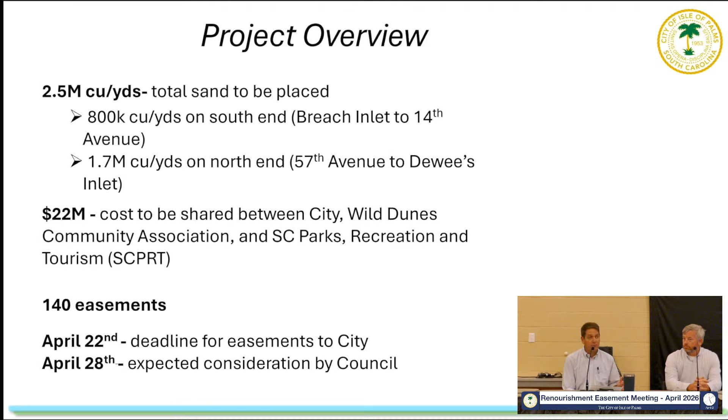Thank you. Again, my name is Stephen Traynum, president of Coastal Science and Engineering. Our company has been around since 1984, focusing solely on coastal erosion problems and solutions. We've done over 50 large-scale beach and ocean projects up and down the East Coast, very similar to this. I've been with the company about 20 years and been working at Isle of Palms that entire time. I think my first field trip to the coast to collect any data was coming down in 2007 and looking at the sandbags that were all over the east end of the island.

Next slide. Okay, great. So this project, in some ways, is very similar to prior projects completed at Isle of Palms. We did the first nourishment.

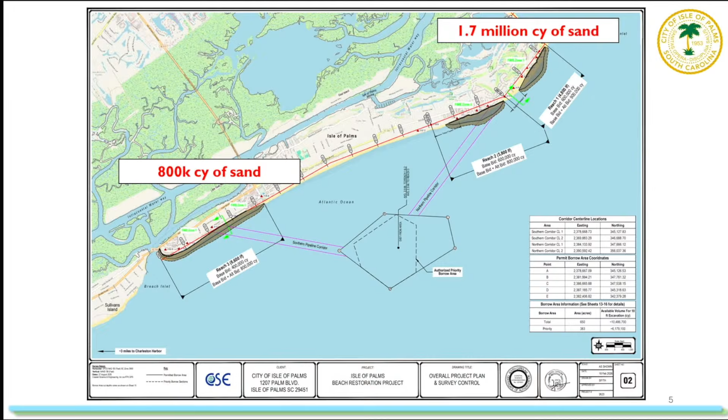Equipment, the staging on the beach, and how it looks, how the dune's built. There's photos of that back there, so I encourage you to check that out after the meeting.

The work will be done with a cutter head dredge. That type of dredge has a continuous pipe that connects the dredge and the borrow area to the beach, so that pipe will come on shore in the center of the fill areas, and then they will work north and south to complete the work. Next slide.

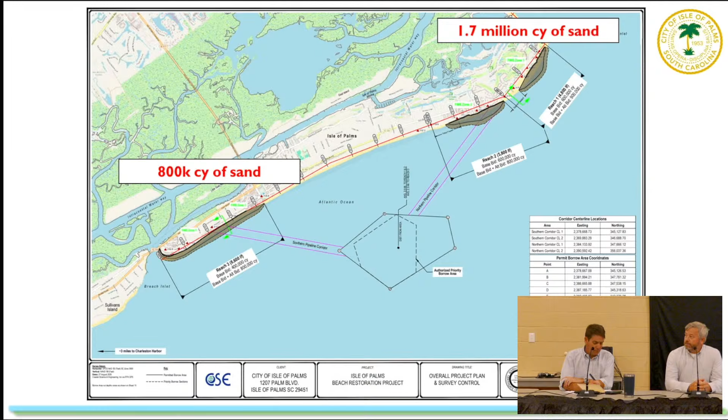Right now, the project includes removing any existing sandbags. The state permit for those bags requires that they be removed, so that would happen in concurrence with the project. In any areas that are currently still vulnerable to erosion, there's a handful of properties, including Ocean Club, where water's still getting up near the building. We would coordinate sandbag removal with construction to make sure that the building's protected. We're not going to remove all the sandbags well ahead of nourishment and leave that structure vulnerable. In 2008, we actually had to build a berm around the sandbags, come back, remove the bags, and then come back and refill that void after the fact. I think it would be an easier operation this go around.

Any areas lacking healthy dunes, we will build new dunes or supplement the dune sand that is there, working seaward of any existing stable, healthy vegetation. We are not looking to bury healthy dune areas, vegetation, anything like that. We wouldn't be removing sand fence or vegetation or fencing or any other kind of landscaping infrastructure through this project.

We essentially work from the existing escarpment line. If there's a cliff on the beach, we like to tie into that, or the landward point of the seaward point of our easement area. So when we're complete with the project, we have a natural looking dune system that maintains public access to the beach, and then you'll have a dry sand berm seaward of there. The berm, depending on where you're at in the project, right now is anywhere between 200 and 700 feet wide. 700 feet is one of the largest nourishment berms that happen anywhere on the East Coast. You go down to Louisiana where they're rebuilding entire islands, you may find some wider berms down there, but that's a very wide berm, and there's some places we may even be a little wider than that.

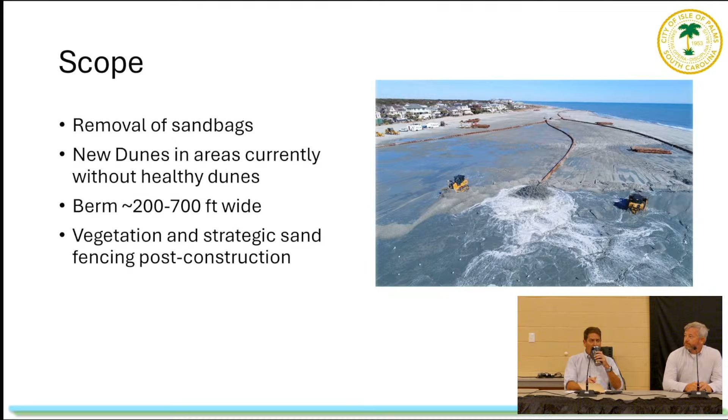A couple of photos of what the project will look like. Up on the top left, there's the steel pipe. That's the pipe that they use to extend the fill down the beach. So you'll see periods of time where that pipe is staged on the beach. Behind the pipe there, you see a couple of container boxes. Those are actually mobile offices that they drag down the beach over the fill area. And you can see those in the bottom left photo when they're on the newly established berm.

On the top right, you see a Y valve where they spread pipe into multiple areas where they can fill. That allows them to fill one part of the beach while they're extending the pipe on the other part, and then they'll flip and nourish one part while they're extending others. So they keep the dredge operating 24/7 and not stop the dredge to have to move pipe around. In some places, you actually may see 4 stretches of pipe moving down the beach.

As they're completing the project, they generally close off a section of the beach in the active construction zone. That area may be about 500 feet wide, maybe a little longer. But where the bulldozers are actually working and the water and sand are coming out of the pipe, they shut down access to the beach to allow that equipment to work safely. They move that area almost on a daily basis. As the project's being built, they may move 100 or 200 feet per day down the beach as they're completing these sections.

So what tends to happen is they will close off about a 500-foot stretch of beach. They will continue to work and extend that closure area, and then they will stop and kind of catch the back end back up at one point. So you'll see it kind of stretch out and then caterpillar down the beach, working, again, 100 to 200 feet per day.

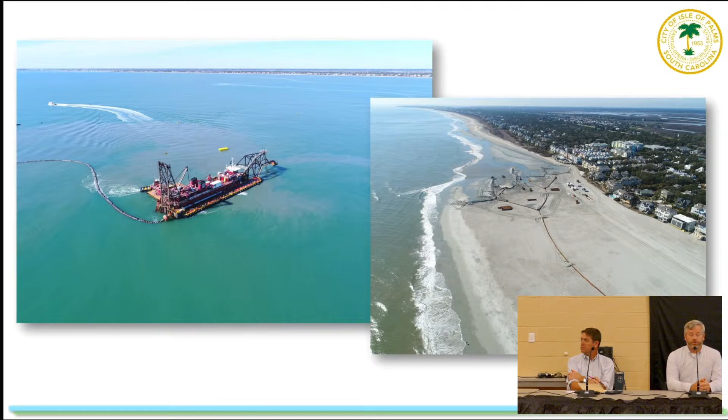This is a cutter head dredge on the left. Essentially, it's a barge with a big vacuum on the end of it that sinks down, or the cutter head goes down into the offshore borrow area, 8 to 10 feet. That's how thick of a section of sand they're digging. They'll pump that through the pipe. That slurry comes out at about 15 feet per second. It's a lot of water and material coming through.

There's about 20,000 horsepower on these dredges. It takes 10 to 15 minutes for the material to actually go from the dredge to the beach through that length of pipe. You see on the right, the single pipe on the bottom right side of the image going.

If you could go back one slide and take a look at the photograph on the right side of the screen. Part of the challenge in talking through with people is that in that photograph, where that equipment is staged, is technically private property. Generally, the deeds on this island extend private property out to the mean high water mark. So that's an excellent photograph showing that that project and that equipment, those pipes, are all on private property at that point. That really is the conundrum that requires us to get these easements.

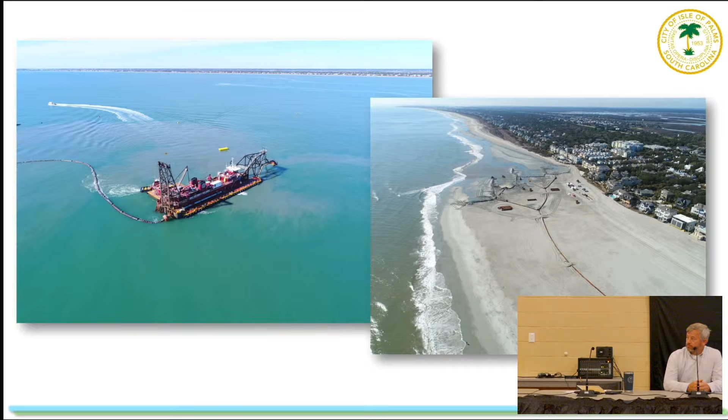Mac may get more into this during his part of the presentation, but this is an excellent example: for this property that has now been renourished, the mean high water line is way out here. You can see where it goes from kind of dry to high tide.

It's the mean high tide, so the average of all those. You could have a 6'8" king tide, or a 5'4", or whatever it is, but it's the average of all those, and it's a dynamic sort of line in a sense.

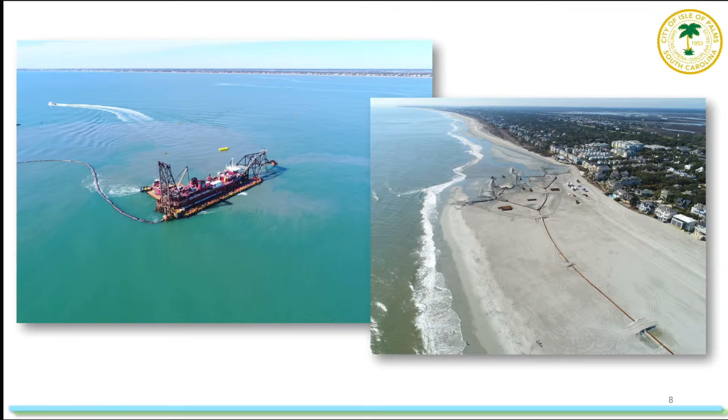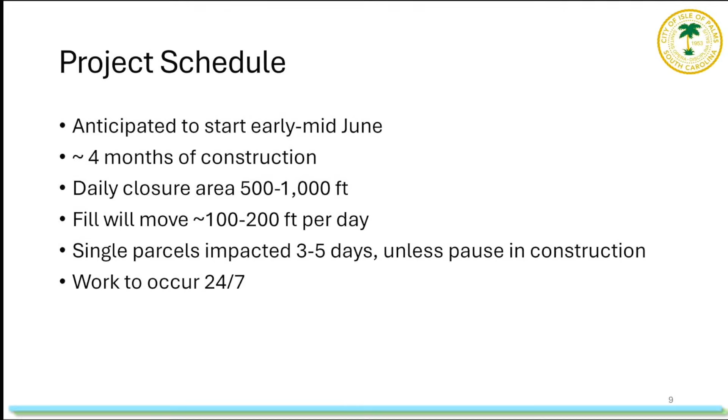I think I've mentioned most of this before. We would expect a single parcel, whether it's a condo regime or a single house, to be impacted by that construction site for a period of 3 to 5 days.

They will work 24/7, nonstop. They will not work on July 4th, we've been told, so that'll be one day of reprieve. As for lighting at night, yes, since the project will be done during sea turtle season, they have very strict lighting requirements, and they will have monitors on site at night to make sure they adhere to that. Essentially, most of the lighting needs to be directed offshore and not up and down the beach, and they will try to do that.

The biggest issue we tend to run into is the backup alarms, which create a decent amount of noise - if we turn the volume up on these videos, you can hear what that sounds like. The lighting needs to be directed offshore, meaning the light plants would be up near the dune area pointed towards the ocean, so that if you're looking up and down the beach you wouldn't see them as much, but you will see some lights. It's unavoidable that you will see some lighting for the site.

Do you want to ask some questions? We do have a whole section of the agenda dedicated to questions, so if you don't mind, we'll get through Stephen, then Mac, and then we'll open it up for questions. Yes, thank you, I would love to stop and answer that.

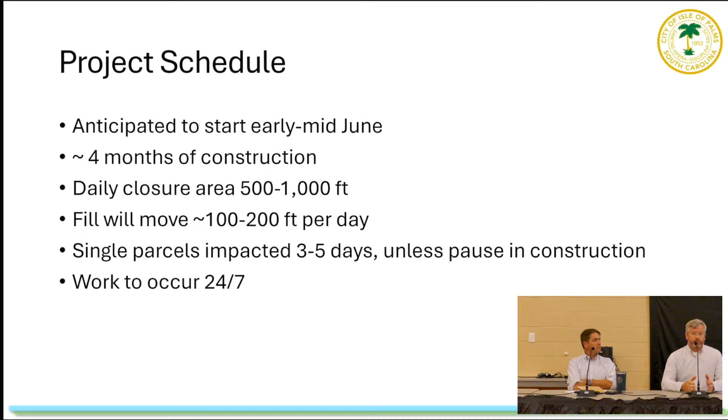Again, if work does shut down for weather or mechanical delays, what they would generally try to do is reduce their footprint to the minimum amount possible, open up as much of the beach as possible, but sometimes those delays are a day or two, sometimes they may be a week or two, depending on what's going on. All right, next slide.

So a couple of things to look at are that we would expect to see: we will not be working under decks, patios, porches, or any erosion control structures or houses - basically any structure. Their equipment will stay away from those structures. Generally what would happen is they would take their dozers and push sand to the point where it starts to fall under, like if it's a dune walkover, where it starts to fall under the post, and then they stop because they don't want to damage any of those structures. That may leave a void of sand under there that an owner may want to fill in, but we don't want to risk damage to the structures and have that on the contractor's liability.

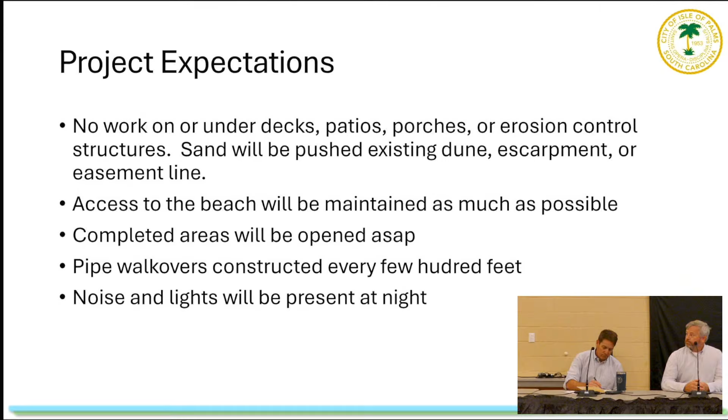We will be working up to the point where you have a vegetated dune in areas that we can, or there's an existing escarpment, or to wherever the easement line allows us to work. There are a couple of places along the south end, especially where the easement line is further out on the beach, so there may be a gap between where our work would stop and the existing dune or escarpment line. I think I mentioned the rest of that.

So next slide, please. This is one example of an easement. It's kind of difficult to see at this scale and from this room, but it shows the hatched area with the state setback line in red, which was the landward limit of our easement line. As you go further north, the setback line gets into the dune field, and so we stopped our easement line just inside the dune field, putting it into the vegetation a little bit in those areas.

The main reason is that if we have a storm event that occurs between now and construction and you lose 10 or 15 or 20 feet of dune, we want to have the ability to rebuild that dune for you. So we wanted to move that easement line as far landward as we could in those areas because we want to be able to get you back to where you were. So if you see a hatched area that covers any vegetation right now, if that vegetation is there when we go to build the project, we're not going to bury existing dunes or vegetation - we would work seaward of that point. But the easement, for your own interest, we want as much flexibility as possible there.

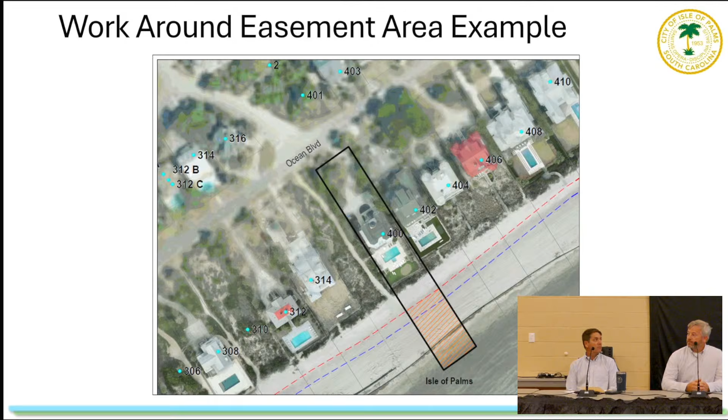I'm Mac McQuillin, I'm the city attorney, and I got to turn my mic on. I get the exciting topic of beach renourishment easements. I remember you from the last time we had this back in 2023. I see my law professor, Alan Medlin, and a lot of folks that were here. This is not your first rodeo with the easements, so some of this will be repeats from last time.

The first big question is why do we need beach renourishment easements? Douglas went into this with that last image. If you go to the next slide, you can see this image is from one of the projects.

That's why this is needed, because some of the sand will be placed on private property, in the backyard. This is unlike the last project though, where we were literally scraping sand up into people's yards where the erosion occurred. This is a little different in terms of the easement area, but that's why an easement is needed.

All of the work, though, will take place either seaward of the state jurisdictional line, depicted as the red line in the image, or where the existing erosional scarp is located. That was in your cover letter.

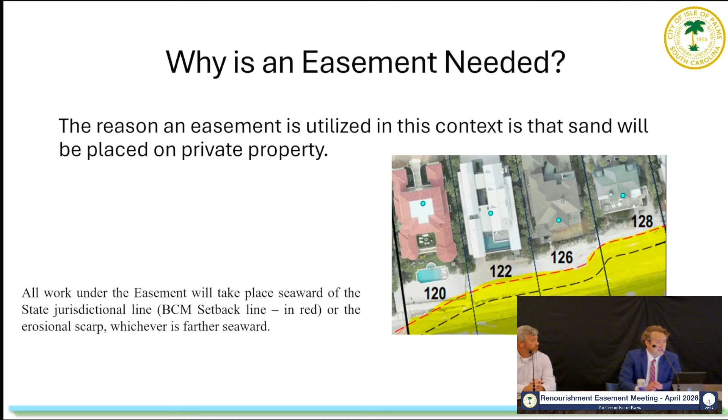One of the big questions last time was whether we were going to do a permanent or temporary easement, and we've opted, like we did last time, to go for a 2-year temporary easement. The city would prefer, obviously, to have a permanent easement so we don't have to get these signed and executed every time and can act quickly in the event of a storm or erosion event. But we opted to ultimately go 2 years, exactly what we did last time.

So I want to get into an explanation of some of the various easement terms and common questions we've got on this. The big thing is the language of this easement is very similar to the language we used last time.

Next slide. Again, this is language based off of the Army Corps' easement and other easements that municipalities have used. This went through, both last time and this time, numerous rounds of revisions from property owner feedback and their attorneys' feedback as well. I think we've got a good product here that makes sense.

As I mentioned, after the easement was circulated, we got additional feedback this time from owners, and the city has made several important revisions in an addendum. My understanding is that addendum has been emailed out to all of the affected property owners. We also have copies here with notaries, so if you've already turned in your easement, signed it, had it notarized, and sent it to the city, many people have, you can sign the addendum here and have it fully executed as well.

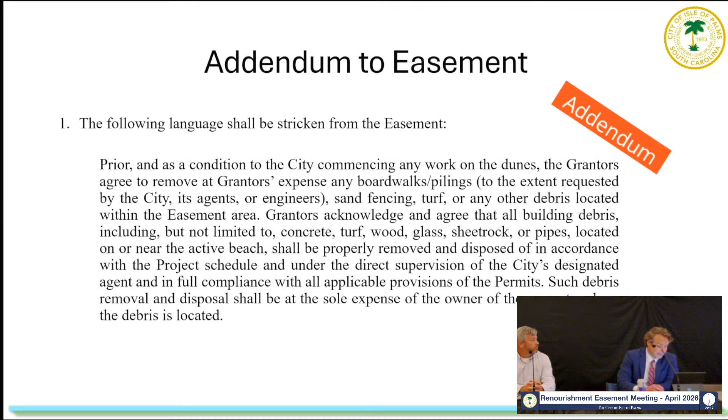Obviously, as you probably know, there's a seawall on the beach too, and we received feedback from that owner as well, so that provision was taken out. The next slide covers what's called the habendum clause, at the end of the easement.

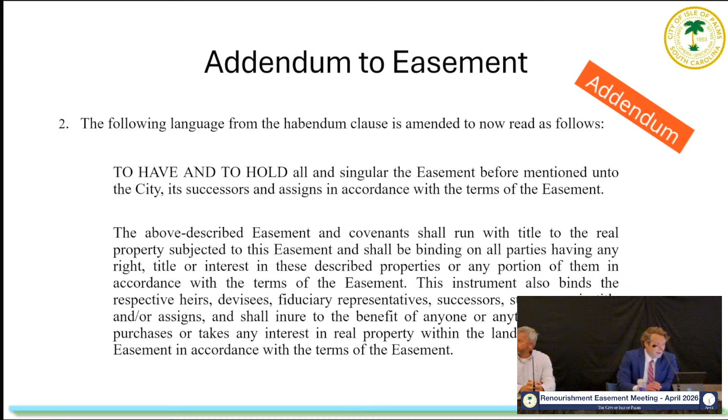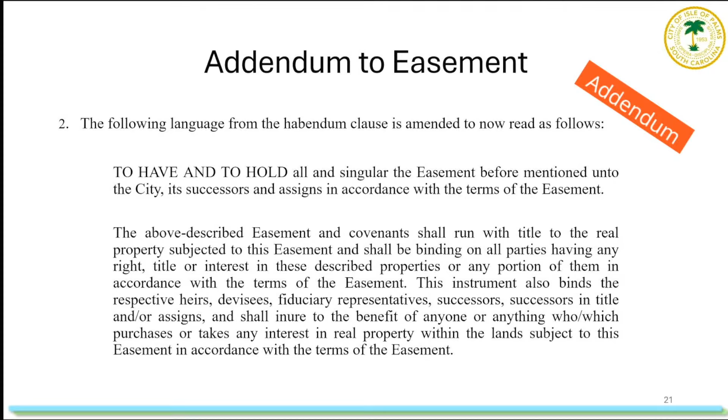It originally read at the beginning 'to have and to hold all and singular the easement before mentioned unto the city, its successors and assigns forever.' We received feedback from several folks asking why we're using the word forever if this is a temporary easement. So we added to each of these sentences in the addendum a clause stating it's in accordance with the terms of the easement. The only thing that doesn't expire after 2 years is the release language, because the city and its engineers can't guarantee this will stop Mother Nature or prevent erosion in perpetuity, so that release survives the 2-year easement period. But other than that, this is a 2-year temporary easement.

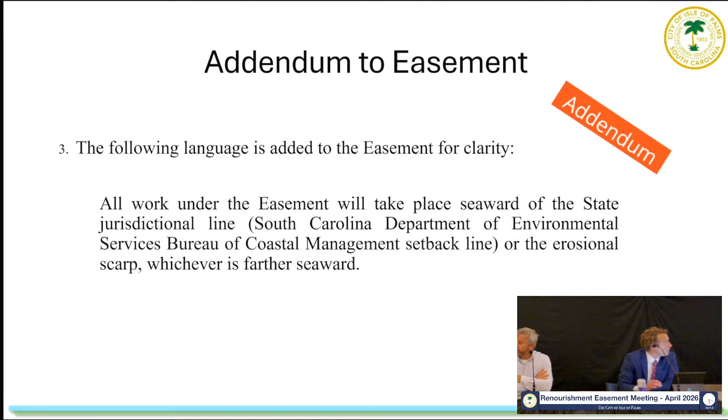Next, this language was contained in the cover letter sent to all property owners, but it was not in the easement itself. So we made sure to include it for clarity that the easement area and the work will take place seaward of the state jurisdictional line, which is the red line in the exhibit to the easement, or the erosional scarp, whichever is further seaward.

Signing requirements, this is important. Last time we got a bunch of easements back that we had to send to the owners to get fixed because they either weren't witnessed or weren't notarized. So if you haven't executed it, we have folks here today who can make sure it's done right. If you've already done it and it's wrong, we'll tell you. Make sure the property owner or owners signed. You need 2 separate witnesses. It has to be signed in the presence of a notary, with the notary's signature and stamp on it. We need an original, not a scanned copy or email, because it will be recorded in the Register of Deeds office. The city and/or my firm are happy to help if you have questions while filling it out.

All right, common questions about easements. One question we got both this time and last time is: is an easement an encumbrance? Yes, all easements are encumbrances on property. Most properties have easements, whether a utility easement, an access easement, and so on. This easement, in our view, is much like a utility easement. It does burden the property, but it does benefit the property by providing protection from storms and resulting erosion.

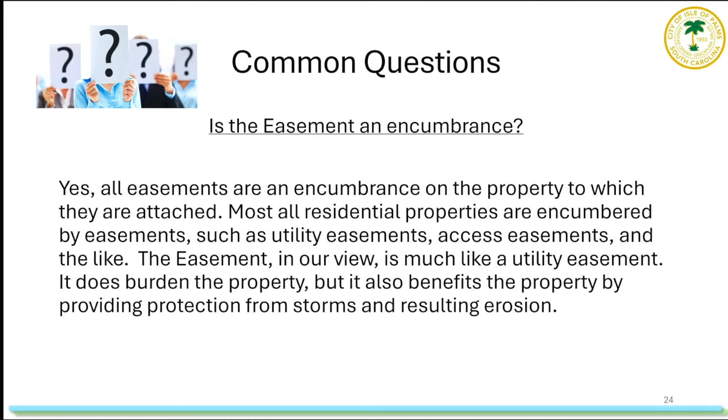Next question: does an easement affect title of property? Yes, it does, just like any other encumbrance. But also like a utility easement, it should have no impact on the market value of your property. In fact, if your property is protected from erosion and washing into the ocean, it's probably going to be worth more.

Can a property owner use the property subject to the easement? Yes. The easement specifically reserves to the grantors, the property owner, and their successors and assigns, all rights and privileges to use the easement property so long as such uses do not interfere with the purpose of the easement. Property owners are also specifically permitted to construct walkover structures, subject to state and local regulations.

Next question: does the easement affect title to any property that may accrete in the future? We've gotten this question a lot, both last time and this time. This easement does not, by its terms, affect ownership rights to any property located seaward of the lots encumbered by the easement. If accretion does occur naturally in the future, the property owner may claim title to that accreted property, but that claim may be contested by the state. Nothing in this easement is intended to prevent any party from claiming ownership, and the easement expressly states that. So this easement is not going to take or give any property — that's ultimately going to be up to what the law and the state say.

Who's filling the gap? Well, it depends. If you look at one of my slides when I had the picture, it shows the jurisdictional line. In one instance, it's further down the beach. Then as you go further down the beach towards the pier, it gets closer and is sort of in someone's backyard.

Steve, I understand the question, and you are correct, it's a little bit weird, and we've talked through the issue. That property actually shows it — you get down to 108 and it's 80 feet, that far from the house. So, just for the benefit of the room, I don't think we really talked about this, but I think the break point is around 6th Avenue, where it follows the dune line. It's still all seaward of the jurisdictional line, but the dune line is the most controlling because it's farthest seaward. South of 6th, it's the OCRM setback line, which is the controlling line.

For most of that project, south of 6th, it works out well — there's not much of a gap. It just so happens that the escarpment and the jurisdictional line are almost the same thing. We do have, and we've talked at council about this a number of times, a handful of properties, less than 10, right at the turn, that have this weird situation we're going to have to deal with, where we'd potentially be putting a berm that's well out from what's currently eroded beach.

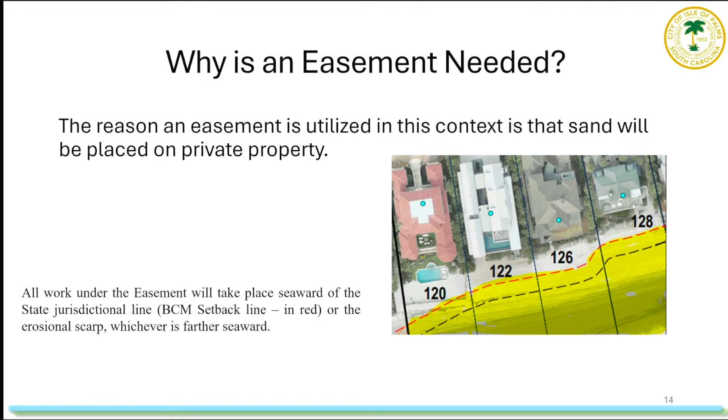It's in the water, right? And we have talked with a handful of owners individually — they don't want that gap. They've indicated to us they don't want a berm that's farther seaward and subject to washing away. They would like us to fill that portion that is landward of the OCRM line and take it all the way to the escarpment. And I think the city is willing to do that.

That's how we initially contemplated the project, but there was concern about the process — in the future there could be this jurisdictional line issue, and could this renourishment have an impact? So it was really created that way at the request of the owners. Again, we very much want the project to happen, so we're bending every which way we can to get 100% signed easements, and that's an example of one of those. It will be a little weird for about 10 properties, and it's getting confusing for people who are asking — I'm not an attorney, I don't give legal advice, but I'm getting these questions and it's unclear.

So would your legal advice to those people be not to sign the addendum, so that they can then work landward of the jurisdictional lines and fill that gap? Because if they sign the addendum, you can't work in that area.

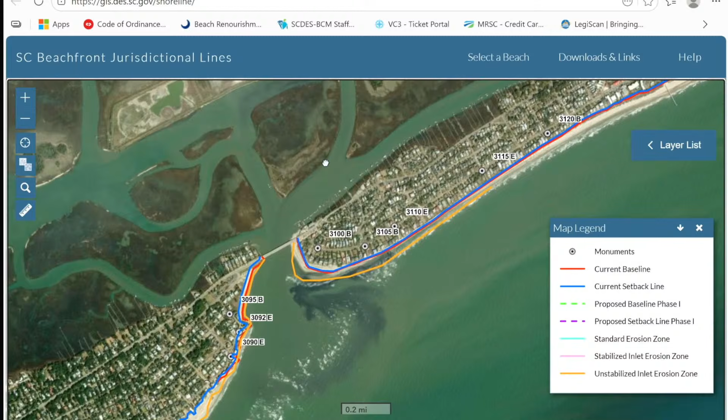Douglas, you want the unstabilized inlet zone? Orange. Steve, is it? Yeah, it is. It's the yellow line here, and yes, it does go to the 600 block. The whole 600 block. Stops at 6 and goes south. So all the properties south of 6 are governed by a different mathematical formula, to correct those jurisdictions. That's correct.

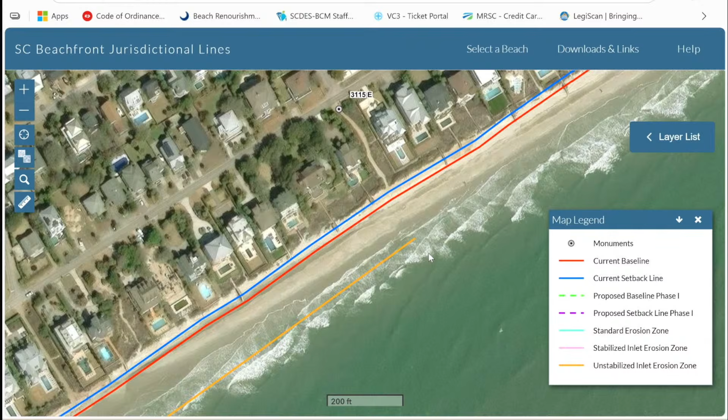Any other questions? As I mentioned earlier, I'm with the Sea Cabins, and I wanted to find out how is this renourishment construction going to affect our pier? Is anything going to affect it, or could there be potential damage to it from the pumping of the sand through there?

Yeah, there's really no risk for construction. The equipment will not be working directly under the pier or even right up against it. We'd be tapering the fill down, probably even before we got to the actual pier limit, so all of that will be protected. They're used to working around piers, even under piers, through a lot of nourishment projects.

You've seen a lot of accretion under that pier the past year or two, with sand moving from the north, pushing the beach out. So it looks like the pier may be getting shorter, or at least shallower. We'll be adding a good bit of sand to that whole system.

Some of that sand may move to the north temporarily. That area's been gaining for years, and you'll likely continue to see gaining sand over time in that area just from the natural dynamics. That's kind of a post-project, long-term potential change. There's no risk, it's just more sand at the pier itself.